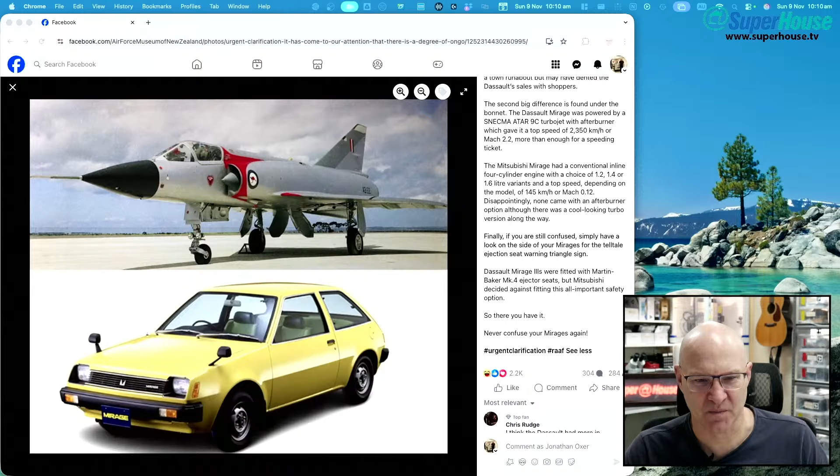And I wanted to do it at a time when Paul was in the chat, since it was Paul who sent it to me, and it would be kind of disrespectful to play around with it when he's not even here.

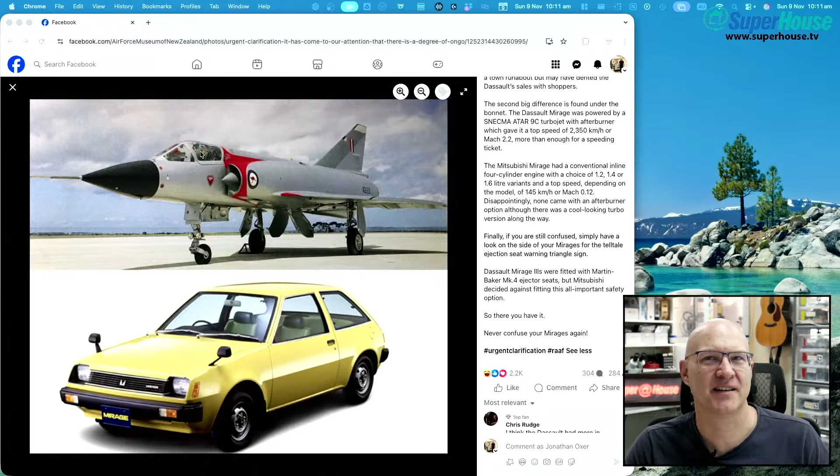Now, so is everybody clear now? You can pick up the subtle telltale signs, the differences between the Dassault Mirage and the Mitsubishi Mirage? Good, I'm glad we got that sorted, and we will no longer be confused by those two things.

Okay, now, as I said, my plan, such as it is, is to play around with putting together the SO-101 robot arms.

Oh, they got little assembly videos, that's cool. What have we got? Example output, finding all the robot ports, find the USB ports associated with each arm. Okay, that's after doing some other stuff. So my goal for today is just to do a bit of mechanical assembly and have a chat while doing it.

So, whoops, I just locked my computer. I moved the mouse down towards the bottom left corner. So you're getting...

...the Apple desktop screensaver thingy. Luckily it didn't stop the stream. At least I don't think it did.

Oh, Paul. Okay, so Paul just said that the package he sent is the subject of his Everything Open presentation. Okay then, I do not want to reveal anything that you don't want to reveal.

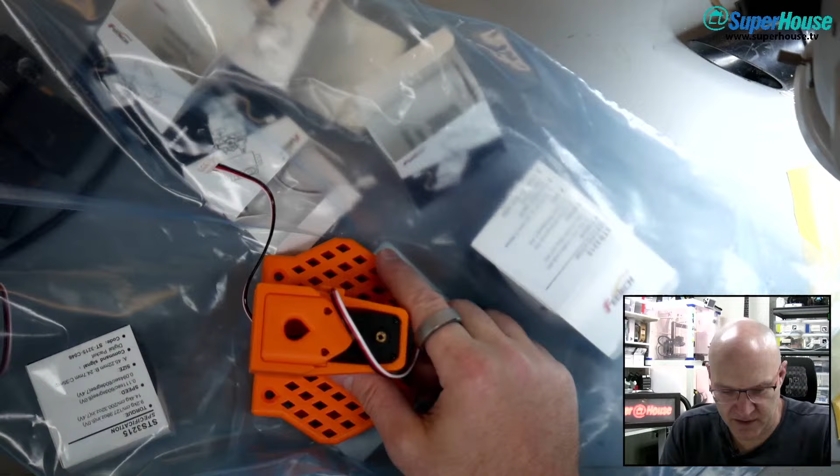So I will put that aside for future playing around. What I have here is a big bag of stuff with some partly assembled stuff. Which are these? Oh, there's a base, and I need to swap this motor.

These are leader motors. Okay, a lot of this is going to be me thinking out loud as I go through this process.

And here I have a big plastic tub full of 3D printed parts. You can see there are orange parts, there are black parts, and there are these boxes that have got servo motors in them, and USB cables, power supplies. There's an interface board in here somewhere. There's the interface board connected to one of the power supplies.

So, okay, here's the deal. The way these are typically set up, the way they are printed, is you print all of the parts for a leader arm and you print all of the parts for a follower arm, and you can just barely fit the parts for one of those on the bed of a typical 3D printer, you know, like a 250 by 250 millimeter-ish 3D printer, which is the common sort of size if you've got a Prusa or like a Bambu printer or a Creality printer or whatever. They're around that size. So what I've done is I printed all of the parts for a follower arm in orange.

You can see that this is part of a gripper. Oh, the camera is a bit out of focus because it's focused closer to the bench. Things will be more in focus when I put them on the bench.

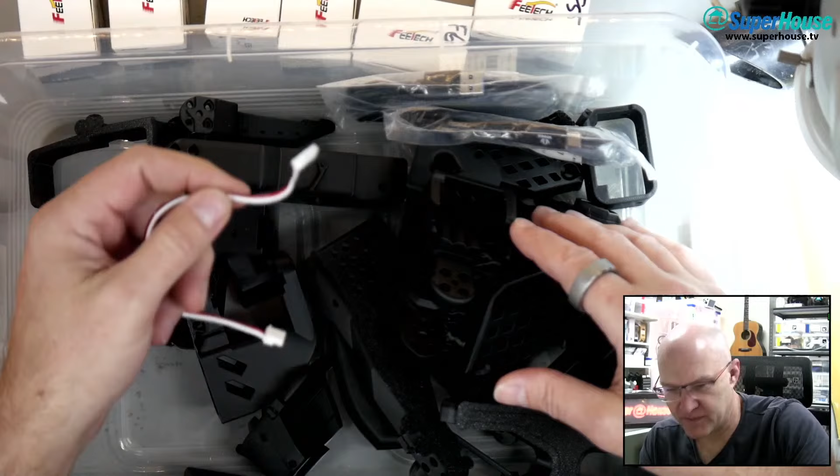So what I'm going to do, these are the follower servos. Oh, there's another orange part down there. Random servo cable. And okay, I'm going to put that aside and then clarify what it is that I'm going to do. Did I just mute myself? No, good.

Now these motors, whoop, it's like a shell game. All right, there are 6 motors in each arm. These motors in the follower arm are all identical. They all, if I stuck them like this, we should see, like that. So they are all 12 volt nominally, so like a 3S type motor. They all have the same speed, 0.222 seconds per 60 degrees, and they all have, like you can see, the same part number. The torque is all the same, 30 kilogram centimeters on all of these.

So all of the follower arms are identical. However, the leader arms are all 6 or 7 volt-ish nominal, so like a 2S battery arrangement, and they have 3 different gear ratios. So you need to be careful about which position you put each one in to make sure that the motor with the right ratio is in the right location on the arm.

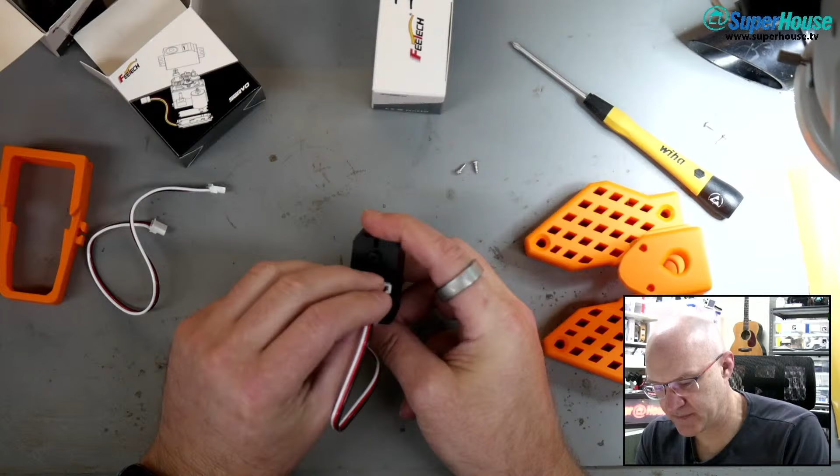So the way these work is that these connect on a daisy chain bus. One cable goes to the controller, which goes to the computer or microcontroller or whatever it is that you're using to drive all of these things. And the other cable goes to the next motor in the chain. When you get these motors out of the box, they all have an ID of 1.

The idea is that it's a little bit like talking to - well, not quite the same, but conceptually - imagine you've got a string of neopixels, like RGB LEDs. And which side should that go on? Sorry, I'm just thinking through. Okay, that one needs to go under. Not that it can't be changed later.

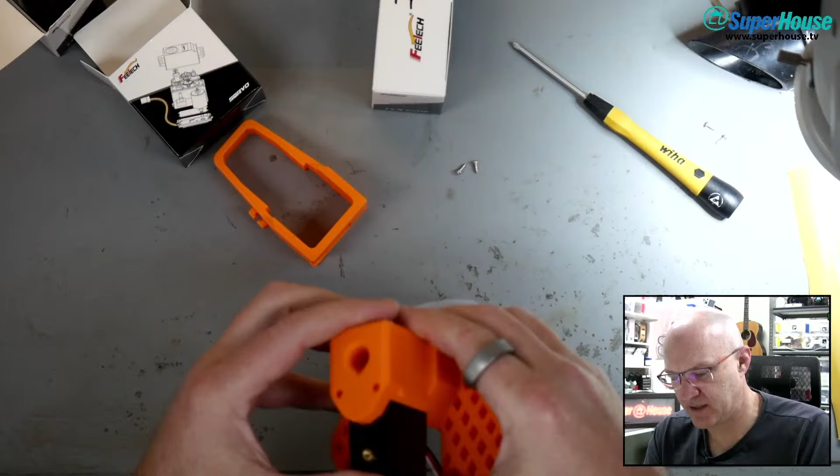But anyway, yeah, so the same way that you would have, for example, a string of neopixels, and then you say, I want LED 3 in the string to be red, and you set that in the data structure inside the microcontroller that you're using to drive them. And then the microcontroller sends the data to the string of LEDs and sets LED 3 to be red.

Same sort of thing: what happens is that all of these motors end up on a bus, and you give them an ID and you address the motor. The actual conceptual way that it works is very different to what I was just describing.

So I'm just going to chuck this cover over the top. It's very different to the way neopixels work, because the way neopixels work, which is interesting, is that you have to maintain in memory...

...the state of all of the LEDs in the string. So say you've got 10 LEDs in a string and you set them all to green. What happens is that the driver software creates a chunk of data which contains 10 values in it, and all of the values say green. And it then sends that string down the line, basically just starts pumping it along and says, here are 10 values.

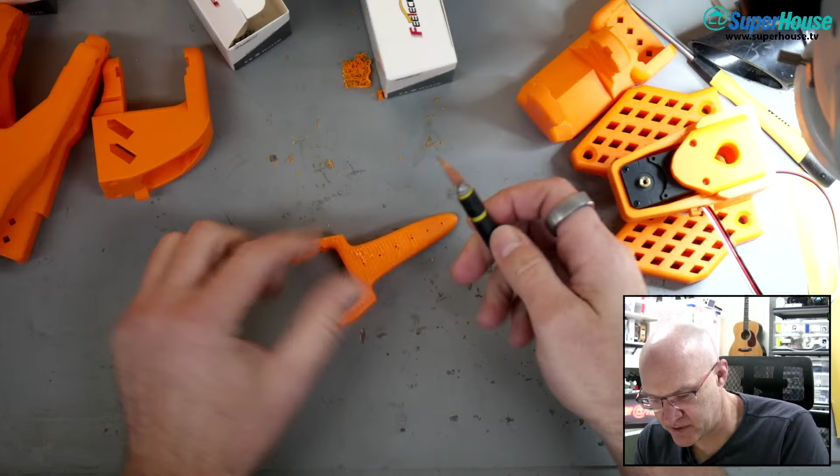Say you had 7, and then you just have a multiplier, or a count rather. So say you want to send 10 red, then 10 green, then 10 blue, you send a message which is, say, whichever order - the multiplier, like 10, then the value of red, then the multiplier of 10, then the value of green, then the multiplier of 10, then the value of blue. The first LED that gets it would see 10 red, and it takes the first one and changes the counter, so it says 9 red, 10 green, 10 blue, because it's claimed the first red for itself, then passes it on to the next one, and the next one decrements the counter.

So the message would stay effectively the same size as it travels down the string, but in that example you'd have 3 multipliers and 3 colors, so a total of 6 variables that you're sending, and you'd be sending them to 30 LEDs - 10 of one color, 10 of another color, and 10 of the third color. So you'd end up effectively cutting your message size to 1/5, if my primary school maths didn't let me down just then. So yeah, you could make the messages much smaller and potentially much faster on the wire, but that would only work if...

I wonder what that's for. Oh, maybe this slides into that.

Does it? It looks like it does fit. That looks like it fits into that. It's a tight fit, and I don't want to be doing the wrong thing, so I'm going to take it back out again, just in case. But it really looks like that goes onto there. Maybe?

We shall see. At some point, I will start reading the instructions.

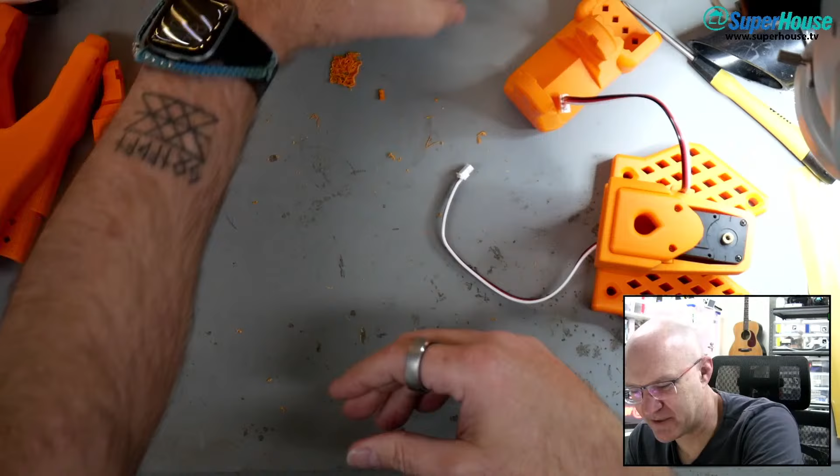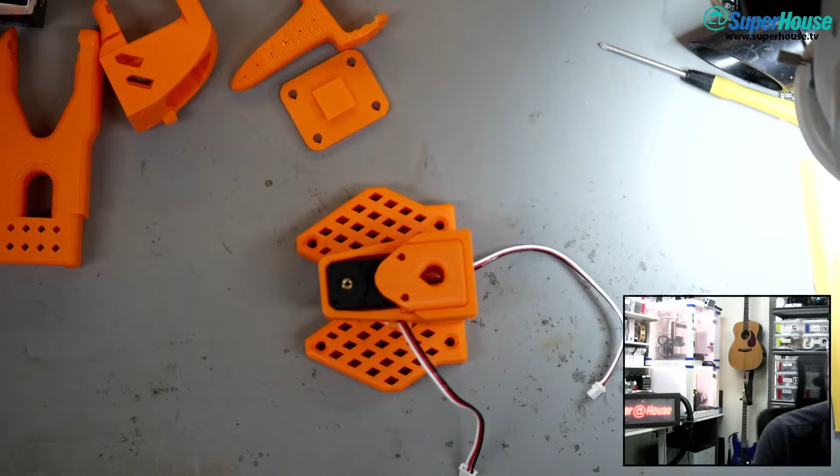The downside of that, of course, is that having a protocol where you would have a count and a value would actually double your message size if every LED has a different color to the one before it. And the point where you get break even is where you have an average of 2 colors per, like an average run of 2 LEDs per color. Anytime you get an average of more than 2 LEDs, then you would have a win. Although I suppose what you would do is, if the multiplier is 1, then you just don't have a multiplier. So you would send a color value, but then you would need a way of telling the difference. Also, the multiplier would be a smaller variable than the color value, because the color value is actually red, green, blue - it's 3 bytes. So it'll be adding a 4th byte, which is adding 33% to the size of the message. So yeah, thinking it through, it wouldn't be as bad as my first assessment.

Now, let's see. What do we need to do? Follow the README. Instructions to 3D print the parts. Yep, step by step. Follower arm, leader. So this follower arm uses 6 motors, the same. This is the explanation of the different motors that are used in the leader arm. Clean parts, please. Okay, instructions are here.

Adafruit says their NeoPixels have a max length of 512. May also have current limits depending on how you configure them, says Grant. Current doesn't matter as you can inject more power along the string. And Paul asked, is there a limit to the length of the string in NeoPixels? Oh, Grant - yeah, my incredibly naive first pass at a compression algorithm. Grant says it's called run length encoding.

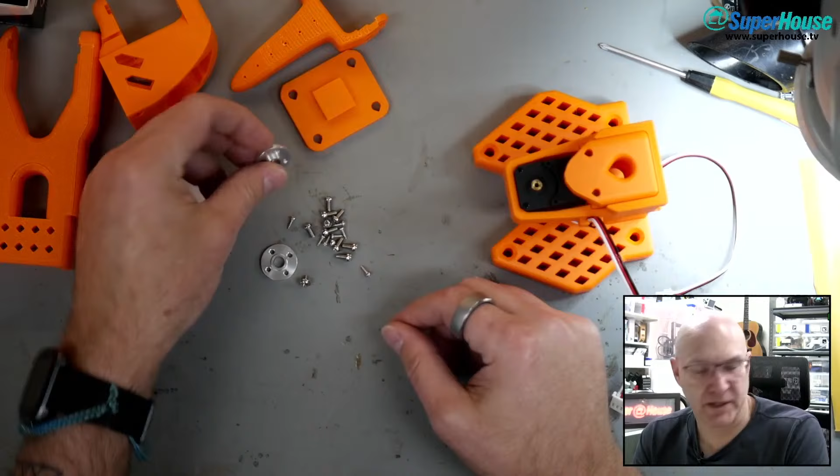What am I looking for? Here, some more parts - these are the parts for this motor. These motors come with 2 horns. They don't look like horns because they're discs, but you can see that one of them has the little knurled threaded thing in it. This one does not, so this is the idler that goes on the back.

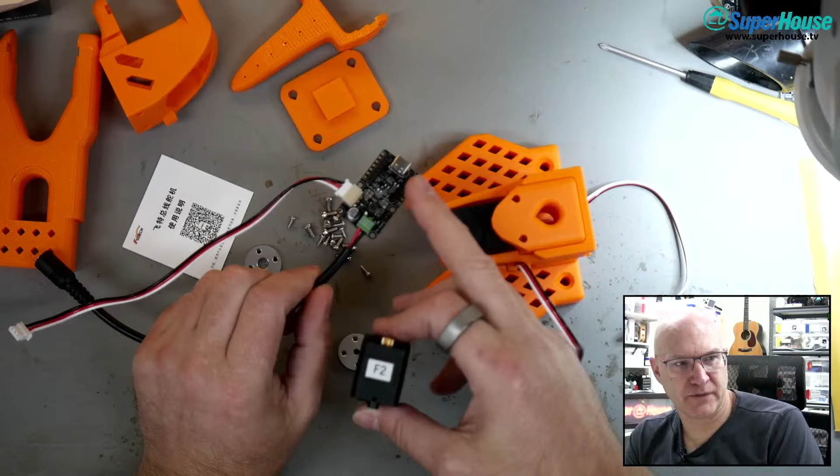One of the things I've done already is zeroed the motor position. These servos have a serial communications protocol that you talk to them over, and they have force sensing and position feedback. So, backing up to 10 or 15 minutes ago, I connected each of these motors in turn to the Linux computer using this little interface driver board, and each one came up with address 1. I then ran the utility that tells the motor to switch to a new address, and left that one as address 1. This one I made address 2, so F2 means follower 2, and so on. Each one now has its own address, and it also zeroes the position of each motor.

So each of these motors should now be at their 0 position. That's important because when I assemble this part of the mechanism onto the servo, if the motor wasn't in its 0 position when I did that, it might try to drive through the body or something - that wouldn't be good. So I need to...

Why is that such a tight fit? What am I doing wrong? When things don't fit properly, it makes me think I'm doing something wrong. It actually takes a bit of force to get it on and off. Is there a key, or is it simply a very tight fit?

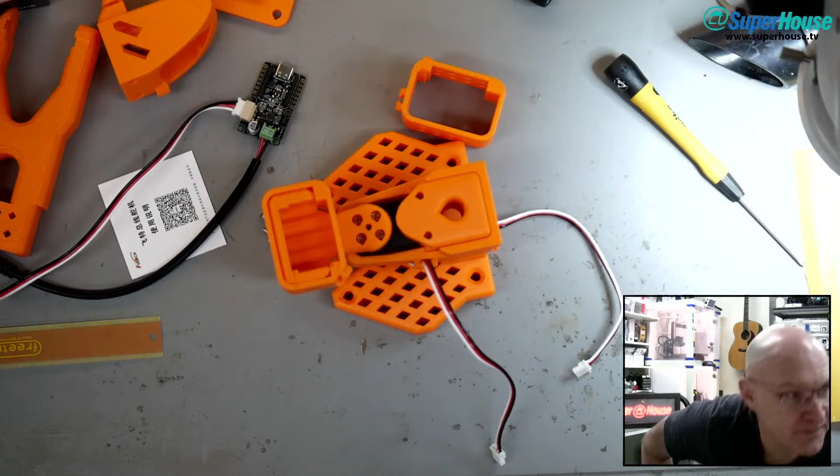Okay, yeah, I should bring the focus of the camera up a little bit. I'm going to do that. Up. Which way? But yeah, to about there, give or take. Focus assist will jump out in a moment. I think that'll be about right.

Now, okay, so we've got, what did it say? Yeah, the tongue twister, shoulder motor holder.

David says, deep sighs, there is no chance I destroy the world. You weren't meant to destroy the illusion of my ability to destroy the world by asking me if there is a risk of me destroying the world. Oh, sorry, David.

Oh, okay, so this is a good one. Mark says, I have a bad habit of forgetting to close the garage door, so I added a reed switch to a Shelly +1 and set up a notification in Home Assistant if I left it open for too long. Very nice, that's cool.

Amanda said, I got my first results back for an assessment, professional development. First assessment, I got 98.5%. You overachiever, making the rest of us look bad. But congratulations, Amanda, that's awesome.

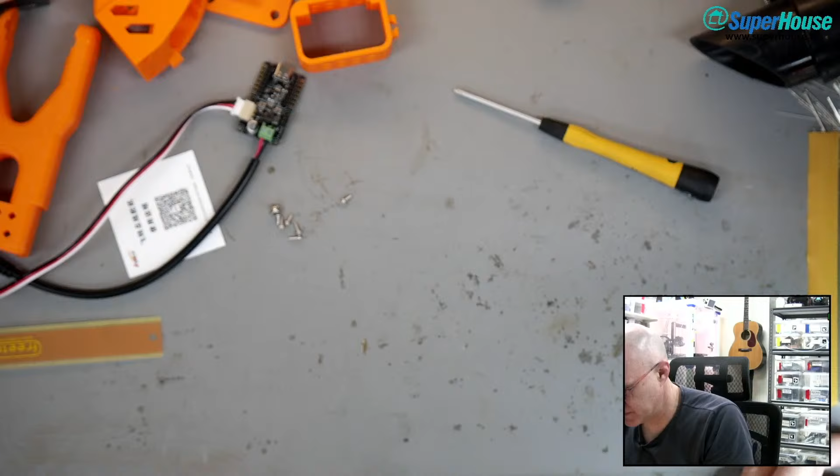I'm going to check the alignment of the hole on the motor. In there. Oh no, that looks right. I can see the hole for the motor. I was just using the microscope to look down into the hole, it's very useful for that sort of thing. So the motor is actually aligned properly. Okay, I'll screw that in.

So, has anybody else posted more nerd brags while I have not been paying attention to the chat?

Where are we? Okay. Matt says, taking many notes on those clever design decisions for holding the motors. Yeah, it is very clever.

Okay, now I think I need... Here's another bag of bits. I need to put the horns on this servo so that I can keep working up the chain. My aim, what is its time? 11:06. I was just going to say, my goal is by the end of the stream to have just this assembled, but I don't think I'm going to make it. Okay, that one on there.

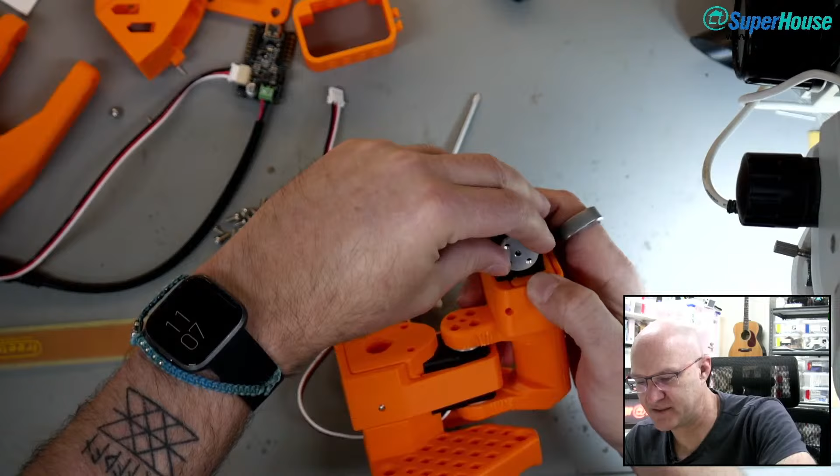Now, before I put this horn on, I'm going to check what happens next. So the next piece to go on, it'll be one of these two, but I don't know which one. I think it is, I'm just looking at them and comparing, it's this one. Okay, so this one needs to go on so that it is horizontal, which means the holes for the horn need to be in a horizontal square when looked at from this point of view. So it needs to be aligned that way. Something like that. Okay, so I'll get it, see if I can get it started by hand.

Yeah, these horns, once they go on, they are on. I don't have a... If I go to one notch, it's tilting down. If I go to the next notch, it's tilting up. But the amount that it tilts up is slightly less than the amount that it tilts down, so that's what I'm going with. Then

I should probably be Loctiting these. If I was going to be doing this properly, I would probably Loctite. Okay, so now I slide.

It's got little clearances on the inside here. It's a bit hard to see, but there is a groove that allows it to clear the screw head, and it will only go on if I slide it down vertically. So I'll put that over the servo horn.

Yeah, I am definitely not going to have time to get to any software related stuff with this. I'm going to be lucky to just have... that is really tight. I'm going to be lucky to just have this first arm assembled.

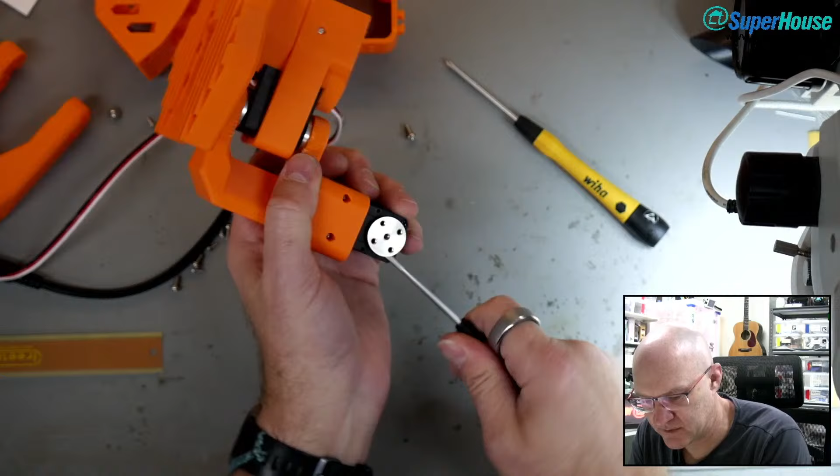Without shoving a screwdriver into my own palm. Okay, so presumably this motor is currently zeroed. It could be that it has twisted slightly from its position, but let's see. Okay, that looks fairly straight to me.

Whoop, I've lost it. Okay, so that looks fairly straight. That looks fairly straight. Yeah, it looks straight.

Why was it not straight when I... Yeah, I don't know. Okay, it looks straight. So I'm just going to proceed with putting the next piece on.

It's possible that the motor has got rotated slightly. It would take a lot of force. I can't move that with my finger.

Which one was it again? This one. And it goes in cage side up. So bend this over.

And then, no, not those. I need M3, yeah, M3 bolts into the horns.

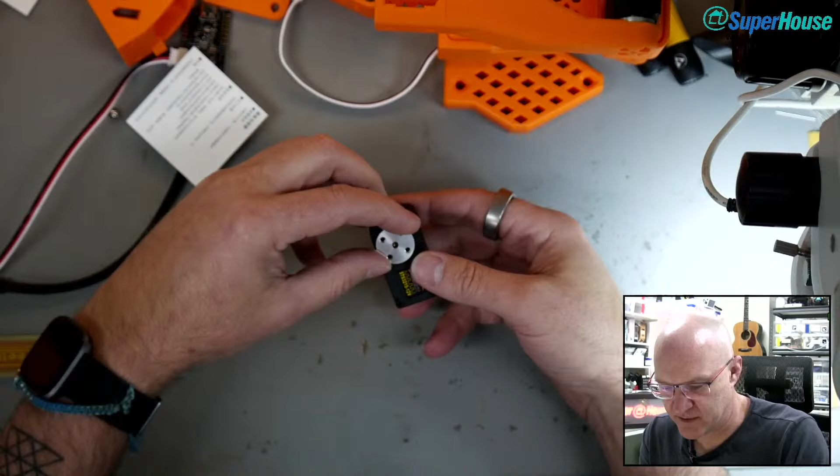Now I'm going to pre-fit this, and according to the 3D printed parts, it goes with the holes across, like that. I've got to do this without displacing the servo so that it maintains its orientation. Now I'm going to do this using the screw to pull the horn on, pull it down onto the little splines. There we go.

And it goes with the horn on the other side like that. The tuning on these parts is spot on. Everything, like nothing is sloppy. That is really firm, but it slides in with a good degree of tension.

Whoever did the design work on this did a really good job. It seems like they've tuned everything, which is tricky because you've also got to allow for printer tolerance and things. Maybe I just got lucky.

Also, printers these days are just more accurate. It used to be that if you wanted a very specific dimension, down to a tenth of a millimeter or so, you would do it to what you thought was correct, do a test print, then measure it or do a test fit. If it fitted, great. If it didn't, you'd adjust your model a little bit and print it again. But now you can say, I want this to be 20.3 millimeters across, and you print it, and it comes out to 20.3 millimeters. Pretty well.

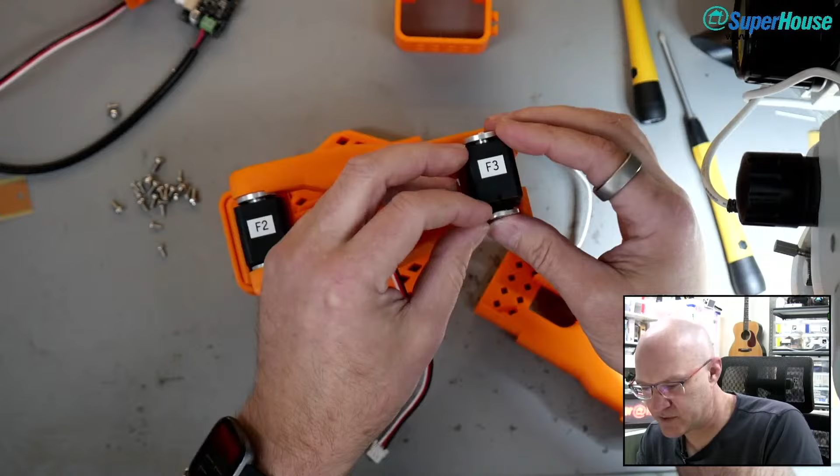And snap this over. Okay, tight fit, snaps into position. Perfection, snapped on. Does it go that way, doesn't it? Yes, it does. Okay, so now those holes are good.

I've just got to rotate the idler. So how will I do that? I'll jam the idler with this and then move this on it. That worked. Yeah, that actually works really well.

Chuck a couple of screws in just to make sure it keeps its alignment. They're not tight yet. And then I've got to do these ones.

What I was hoping was that Andy would come along today with his fully assembled SO-101 arms, but unfortunately he's got a presentation he's got to do tomorrow night, which he's frantically preparing for, so he's not going to be able to make it to the barbecue, which is very sad. You'll just have to make do with checking out this non-functional one. Physically assembled, mostly physically assembled, but no software, not running, not doing anything interesting.

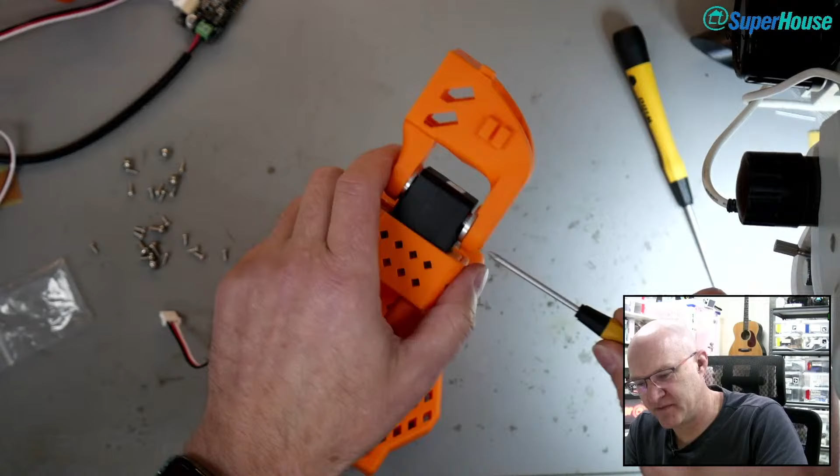Everything else is optional, isn't it? I also have cans of Coke, cans of Pepsi. I've got lemon and orange soft drink, margarine. Got oil for the barbecue. What else is there? HM says beer. Stephen W says John forgot to bring himself to the barbecue. No, there is 1 beer in the fridge, which is not actually mine because I don't drink, but it's my son's and it's been in there for months. So you put it in there sometime ages ago and he's just never drunk it.

If anybody is coming to the barbecue and does want to drink beer or whatever, you are most welcome to bring it. I don't have anything against it, I just don't drink myself.

I don't generally provide it either, because it's a midday barbecue. If it was an evening barbecue, you'd expect more beer consumption to be happening. Maybe I should provide beer. Am I discriminating against beer drinkers by not providing it?

But I figure if I did, the cost of putting on the barbecue would probably increase significantly. I already have to buy all the meat and drinks, the soft drinks and chips and other snacks and stuff, so buying beer as well would add to the cost.

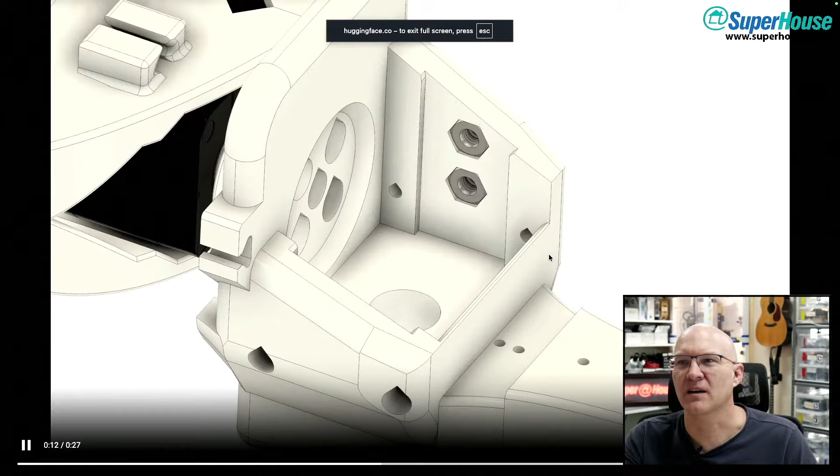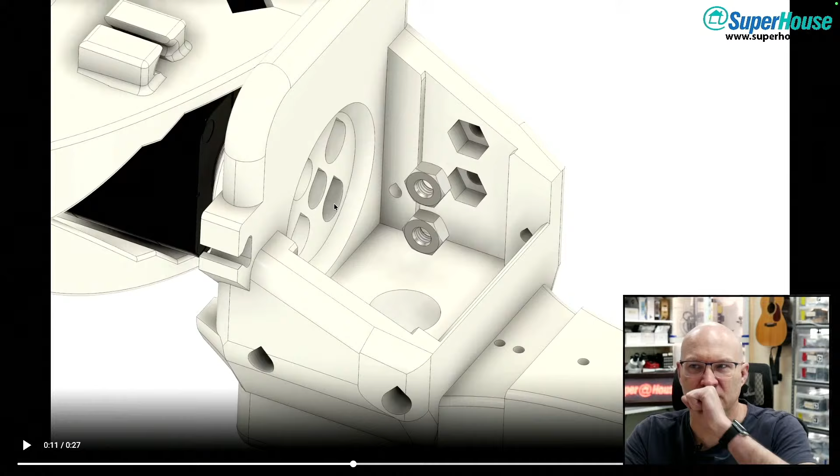Now we've got... okay, so let's just hit play on this one. Come on, play. Okay, so that is on. And then those are in, yes. And then, what's going on here? That goes in. What? Why are those in there? And then that goes on there. So what are those other two nuts for? They must be for mounting the camera, that's my guess, let's see. Let's see that bit again. That's going to be important before I put the servo in. And then what is the orientation of the servo?

Yeah, I can guess that, I think.

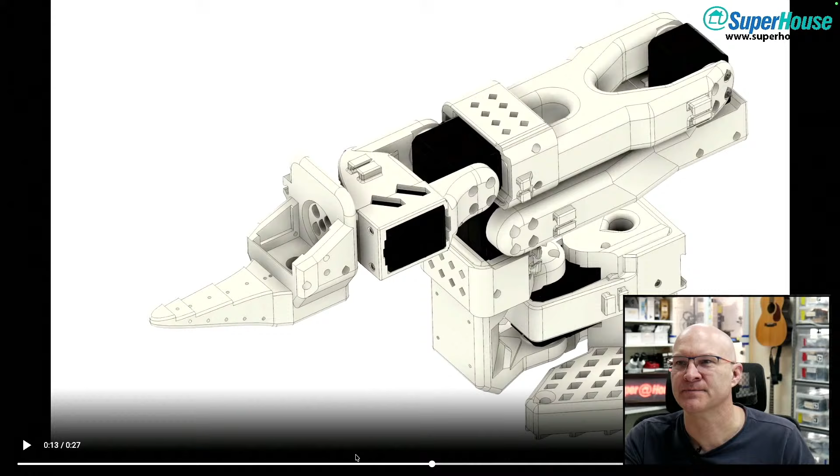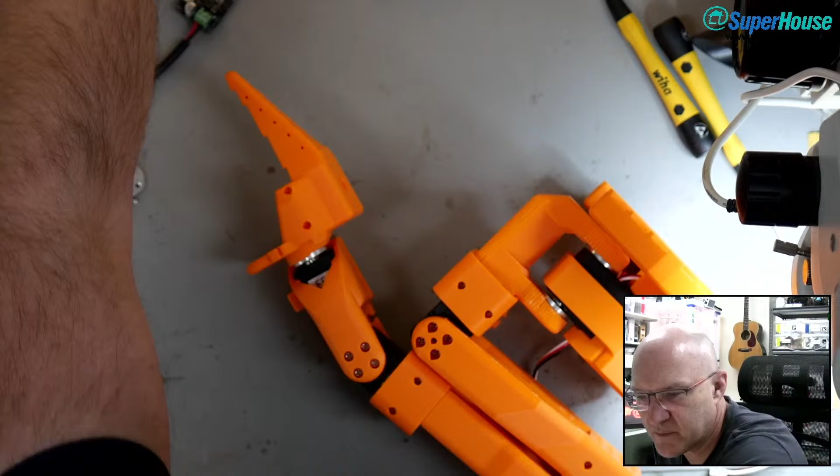Okay, so M3 nuts. What do we do there? So it's got a spot here for some captive nuts, which means I need to grab a couple of M3 nuts because they are not provided with these miscellaneous parts kits. Luckily, I have a large quantity, a voluminous number of M3 nuts.

In fact, I've got them in several different sizes. I'm going to bring the little drawer with me because I have them with different head sizes, and I don't know what is going to be a convenient size for this. So I have this little tray, I've got them in different colors, and I'll try these shiny silver ones.

These ones have got slightly larger heads and might be a tight fit. Yeah, I don't think they quite fit. These ones are slightly smaller. Yeah, that's a better fit. Okay, so I need the ones that are like a matte finish. Put those in.

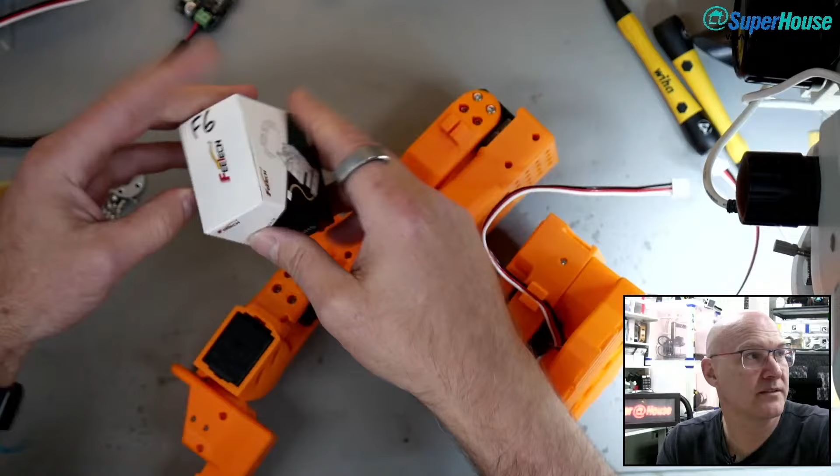Okay, so now we've got the two M3 nuts, which are a press fit into there. And I can put in the last one, servo 6, follower 6.

So follower 6 will go that way? No, must go that way because the cable comes around here onto this side. So it must go like that. Okay.

My guess is that this part will go on with that orientation, which means I want the horn to be aligned once again. Whoop, stay there, don't fall over. With the holes straight across. That, and that. So I want it aligned that way.

Interestingly, it's got alignment marks, 0, 45, 90. You won't be able to see this on camera because it's actually quite hard to see even with your own eyes. There are little grooves in the body that indicate alignment marks so that when you're putting things like the horn on, you can see, nope, that was not quite straight. I need to bring it around a notch. Yeah.

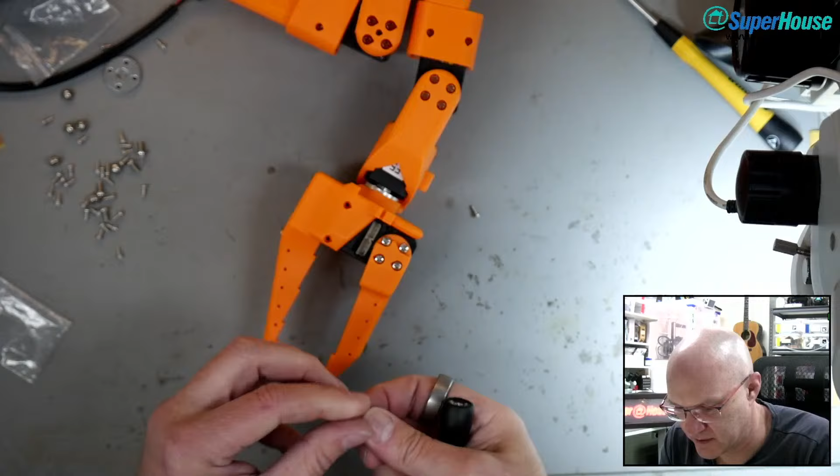Yesterday here was just bucketing down. It got so wet here yesterday. I went up to my mum's place yesterday to help move some furniture, and the downstairs area in what used to be my model train room was flooded. There was like 2 centimeters of water on the floor in the back part of the room.

It's like a semi-subterranean room, definitely a basement in the true sense of the word. It's like all cement floor, brick walls, cement ceiling, like a strong room under the house.

And water comes down the hill because the house is just off the ridge of the mountain and runs in under the house, and yeah, it's not good.

Anyway, the point I'm making is it's full of water. Yesterday, weather bad. Today, weather good, which I'm glad about for the barbecue.

So there we go. This now seems to be, apart from connecting all the wires, I believe, fully assembled. So the next step for me now is to route the wires and connect everything in here.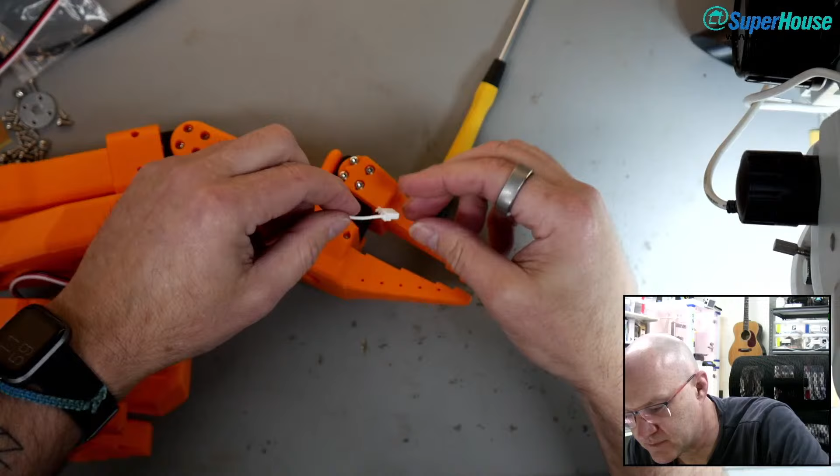And clips into here. And that is the sound of Crispian. CIA raid, CIA raid, okay. Quick, set off the thermite on the discs. No way, mate, I'm good. Oh, I was listening, but we turned out to be 45 seconds behind when we pulled up. 45 seconds behind. Oh, you checked the timing on the sound of...

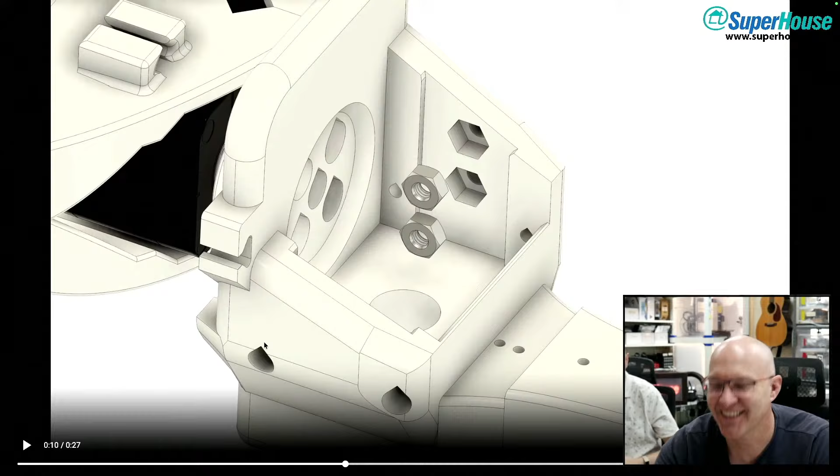I've not worked much with excavators, but I never had an opportunity to drive one, and I think I'd be damn good at it. It's just very disappointing. I might have to buy one. Okay, so new YouTube obsession. I'm going to switch back to the other view to finish up. My ugly mug is getting on the screen. Say hello, Crispian. Oh, there I am. Yes, there you are, on the left.

I'm just going to bring this up and try - excavate. Somehow the YouTube algorithm, look at this, decided that I was interested in mini excavators. So it showed me a YouTube video of someone buying a mini excavator from China, the box being delivered, and what actually arrived in it. And they are surprisingly, entertainingly good. The thing is, the little ones are difficult to drive in comparison to the big ones because every joint has the same amount of flexibility or movement in it, and on a big one, that's a much smaller percentage of the movement.

So you get a lot more slop and backlash, and you can see when they're doing their thing, it goes like that. And also from what I've seen, they're quite top heavy because they've got a very small base. There's a lot of weight up high, and I think it would actually be kind of scary.

But for some reason, Nan said, "Hello Crispian and John." Hello Imi. So probably relaxing after a crazy drive. Yeah.

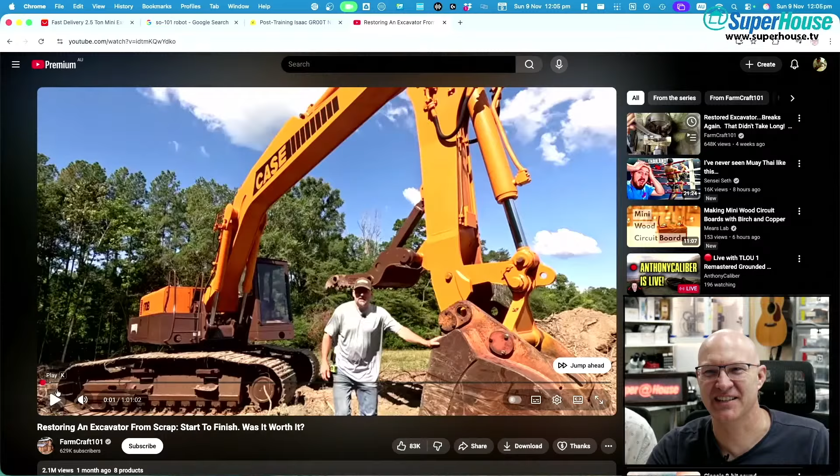Yeah, you sure would. But the other thing is reconditioning excavators. Recondition excavator, I saw this come up in my feed. Oh, here we go. They might put all new bearings and grease them and all that, but the bearings would be made of lead - something pretty hopeless. It would last a day, because I watched that other Chinese mini excavator thing, and for some reason the algorithm has now decided to show me more of these videos, because I said the word excavator.

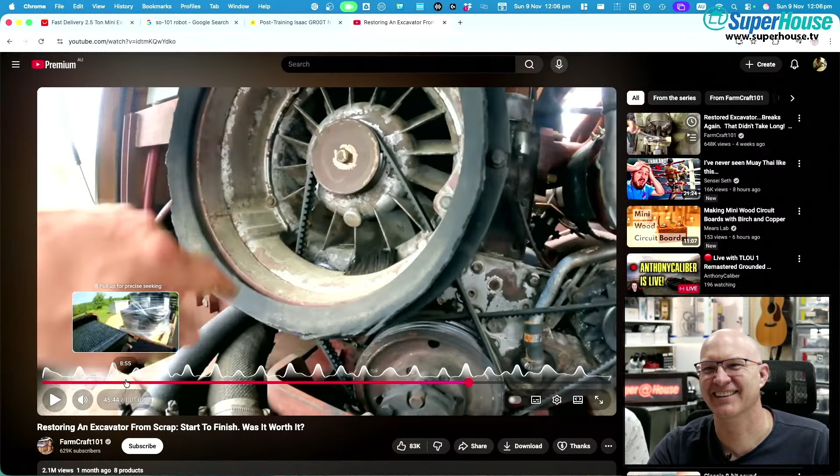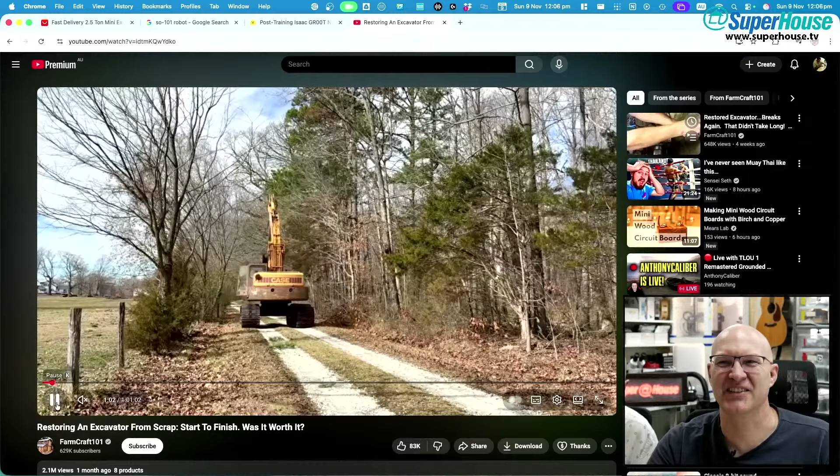So if everyone on the stream blames me, but I am quite happy to have new - they are fascinating devices, look at this thing. I'm just going to mute this. But yeah, that's a 30 tonner, I think. Oh no, it's a 170B, might be a 17 tonner. Looks bigger though - you can buy used excavators. That's time lapse obviously, look at how fast the clouds are moving.

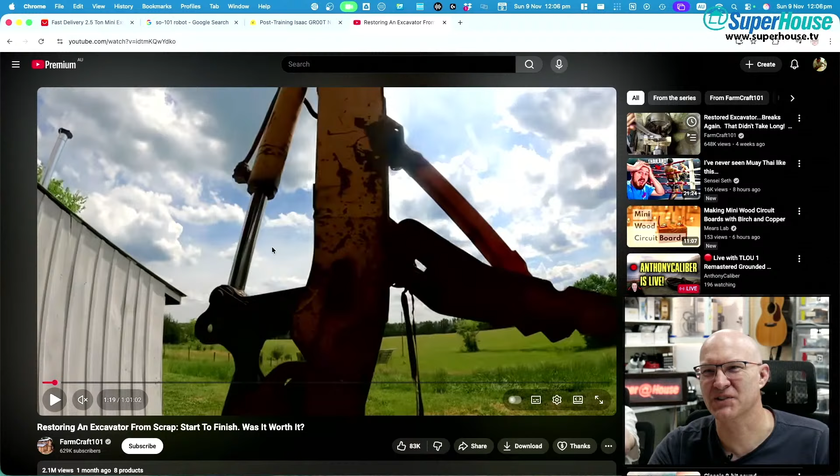Yeah, you can buy excavators in bad condition, all sorts of equipment you can buy in bad condition, and then it may be a good idea to revamp it - it may be a totally stupid idea. $40,000, $21,000, $90,000, $22.62 an hour, 800 - I don't know what that number is calculating, but he's calculating whether it's worth it. The point is, you can do stupid projects like this and actually just buy yourself an excavator and do stuff with it. But yeah, you've got to be a little bit on the crazy side.

Tassie Bob says he thinks the 170B is 32 tons or thereabouts. Yeah, it looks like a 30 tonner. It's just that the naming conventions for all the ones I've worked with have always had the weight in the name, but obviously the case is different or something. I haven't worked with that many cases, and I've done heaps and heaps of construction work, and I'm surprised by that. Grant said all my neighbours have excavators, three sides, I have excavator envy. God, is that Grant Maisels? Yes. G'day Grant, hey Grant. And Scott says, next I discovered Diesel Creek and I've never heard from again.

Okay, I've got to not fall down these particular YouTube rabbit holes.

Wagon Load says, I saw a YouTuber who bought industrial robots. Yes, that's another one. I was talking about that last week on the live stream. There's a place in Melbourne, over in South Melbourne somewhere, that has heaps of big, I'm talking 3-ton industrial robots that came out of car factories and things. Mechanically they are amazing, but they were built 30 years ago, so they're designed to run on DOS, and the control systems don't exist anymore. Retrofitting control systems onto industrial robots is a super fun, interesting project, but I don't have the bandwidth to deal with that right now.

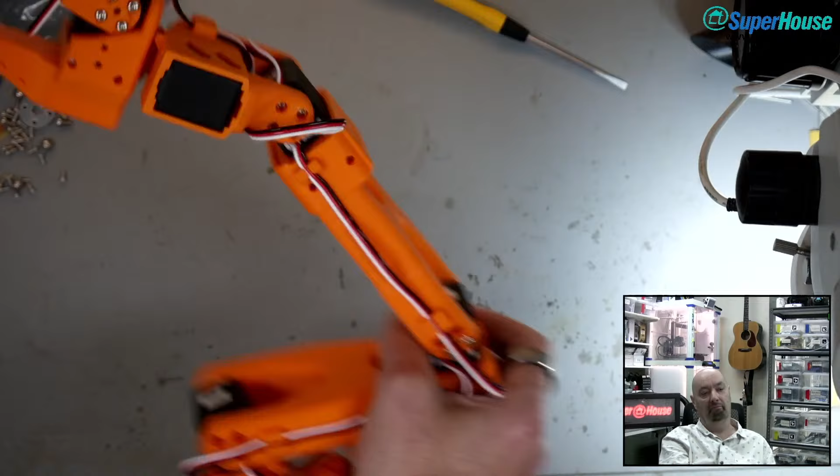That's why I am just messing around with little baby toys like this. That's a cool little toy. It is a cool little toy.

Hey, anyway, you got yourself. Yes. So I am going to go and start. Hang on, I'm just going to switch back to here because Crispian is playing around with the robot to show you. Yeah, it's got him. And do a bit more setup for the barbecue. I've got to get some things out and ready and open the door and things.

So thank you all for coming along to my How to Build a Robot Arm 101 class, and you're all now experts, so I expect you all to have robot arms by next week. Tassie Bob said, Replace what, our regular arms? Maybe, you can just end up with more arms. Why settle for 2 arms? You could be like a Motie and have 3 arms. We need a grip, you need the gripping arm, otherwise you're not a Motie.

Tassie Bob said, what part of the PCB production line is that little orange robot for? You say that as if it's a silly question. It is. I have 2 ideas. One is I need to pick up PCBs after they've come out of the reflow oven and put them on a tray somewhere. The other is I want to take PCBs after they've been tested and put them into the light box to take a photo, then take them back out. Are you likely to sharpen this so it can pick up smaller components? What I'm likely to do is customize something to make it suitable for picking up PCBs.